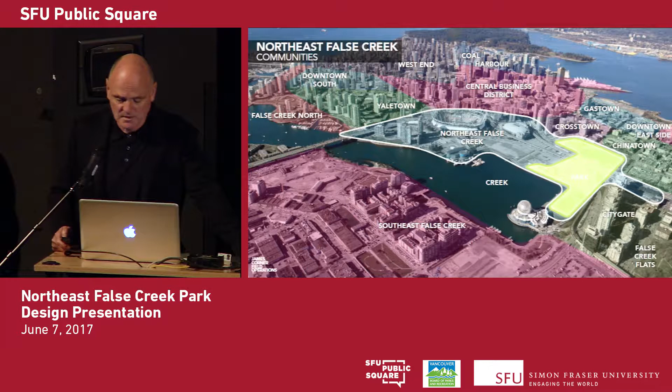Let's just introduce you to some of the characteristics of the site, because it's important to understand that this site has a number of opportunities, but it also has significant challenges.

Firstly is just the configuration and shape of the site itself. You can see how the white outline here shows the relationship of the site to the water body. The water's edge itself, if you could walk just around the East Basin, is 2.3 kilometers, which is a significant experience. There are some very large buildings here which give the site a particular iconic character: the stadium, the Rogers Arena, the Science World.

In pink are a number of developments. These are developers that are building new neighborhoods, mixed use, a lot of residential, but on the bottom is retail and restaurants and cafes and some commercial uses. So these are massive differences, bringing new life, new people, and new vitality to the area.

These are probably the three most significant connections into the site: Georgia Street, Carrall Street, and Quebec Street, forming that edge. Related to those streets are then a variety of cross streets, which in a sense are the major points of entry into the site, tying or literally connecting the neighborhoods, the buildings, the people who live here into the new park.

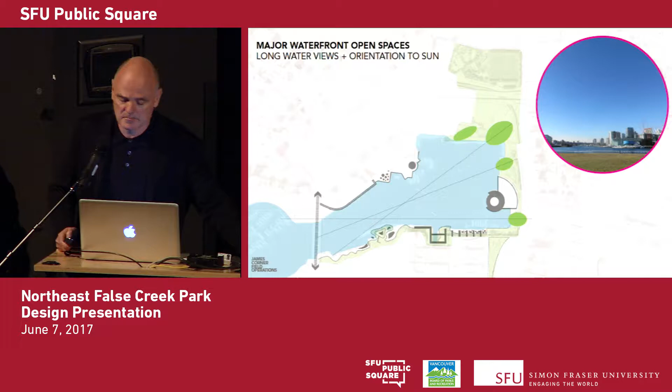So the first move we thought of was to position two large landscapes - the big eventful landscapes, the open and flexible surfaces, let's imagine them as lawns for now - oriented on the long axes of the water body, drawing you towards those long vistas along the water, and also orienting you to the afternoon and evening sun, when most people are coming out to use the park for either recreation or events.

Secondly, in between those large landscapes, let's try to pull the water in and create a variety of inlets where you can actually get down to the water. And let's tie those two moves - the big landscapes and the water inlets - together with a single meandering promenade that lengthens your duration of experience, taking you out over the water and then back inland, out over the water and back inland again, so you have this folded, meandering experience that lengthens and diversifies how you experience the water's edge. Seen in total, this begins to unify the 2.3 kilometers of the Eastern Basin waterfront.

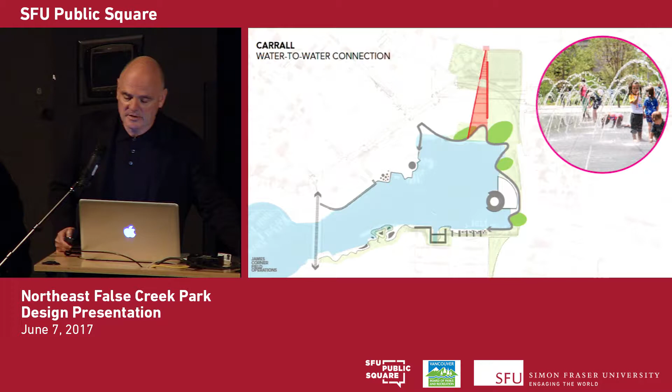The second big move is to look at Carrall Street and the importance of connecting it to the waterfront, especially given that we'll have a new Pacific Boulevard that's going to be pretty big. It will be tree-lined and majestic, but it will still be challenging for pedestrians. So how do we create a strong pedestrian connection along the Carrall Street axis?

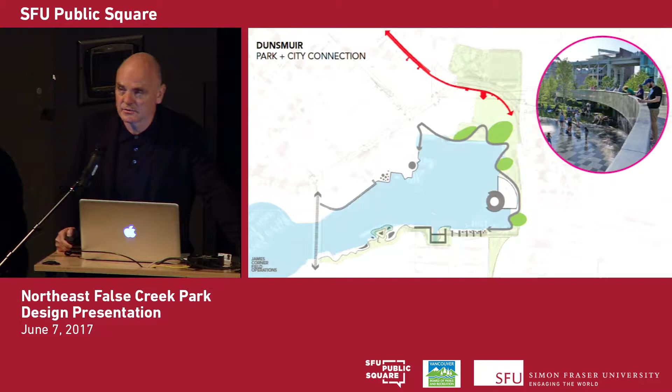One of those is the bicycle, the Seaside Greenway. Here we show an idea to bring the greenway into the park and out to the waterfront on the western side, but then to pull it into the park in order to open up the waterfront and give the waterfront more of a pedestrian identity in the center.

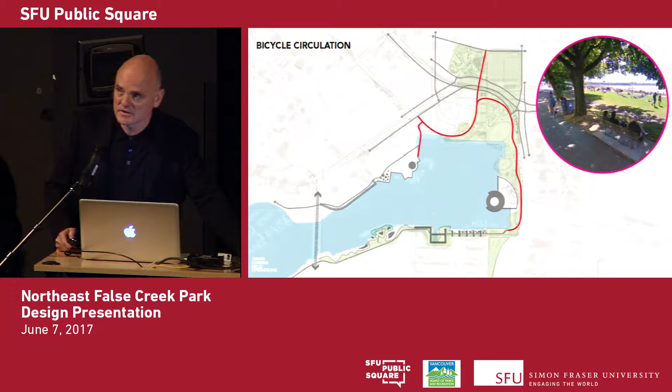You can see in the photograph, this is something that you already do in a lot of your parks already. You pull the cycle tracks back from the waterfront so that the waterfront can enjoy public spaces and pedestrian activity. The cyclists can enjoy free mobility, and they still have long views and vistas across the park and out to the water.

Within that diagram, we create a variety of rooms for a variety of programs and a variety of amenities, from gardens and interactive spaces to lawns and meadows, sports areas, etc.

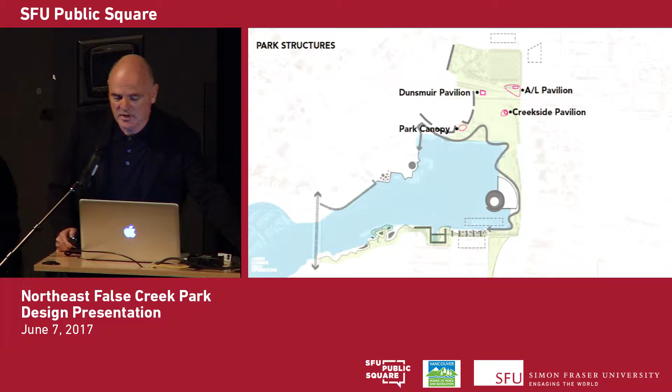There are a number of small buildings we're proposing. The A/L Pavilion is a covered area for the skateboarders. The Creekside Pavilion will be a sort of visitor orientation space. And the Dunsmuir Pavilion will be a small food and beverage, a small cafe, and a park canopy that I'll describe in more detail.

Put together, that creates the sketch, the draft concept plan that I'll walk you through now in a bit more detail.

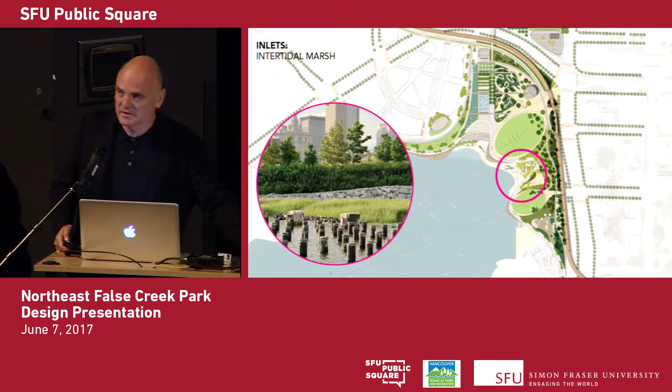The intertidal marsh is this piece that we've folded into the land. We see this as being a very natural area where the water can ebb and flow given the tides. We can scallop the land in this way in order to create a variety of ledges. Each of the ledges can carry a different intertidal habitat zone.

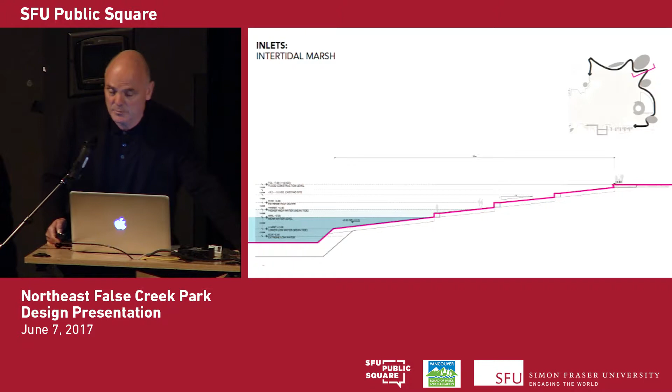It will have different grasses and support different types of bird life and animals. It will have this intertidal quality because there is a significant tidal change in the eastern basin between low tide and high tide. So this is really a place that ebbs and flows and is really a very generous set of beaches and natural areas on a set of ledges that rise back up to the more formal park. But it's a place that we hope is a place of discovery where people can come and just experience a piece of intertidal nature.

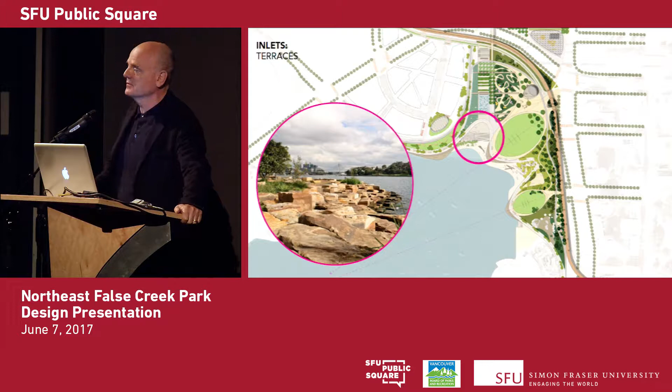The other inlet is a little bit more formal and is oriented towards more people gathering and more social uses. We imagine it as being a set of steps built from stone, and those are sittable, so people can sit on these steps and look out across the water.

At low tide, the beach shows itself with logs and rocks and has a very beachy feel. But the steps also have a rocky quality to them as they step down from the upper levels of the park down to this natural area. And we want the beaches to have this rough, natural, found quality to them.

So this view, you see the two inlets on one side, the seating steps, the rocky outlets, the beach, and on the other side the more natural inlet and the promontory of the Great Lawn projecting out over the water with the axial view to the setting sun.

If you step back, you can see how the ribbon is shaping these three landforms on the upper level, which are quite clean and available for community use. And on the lower level, you have the intertidal landscape with the beaches, terraces, and wetlands.

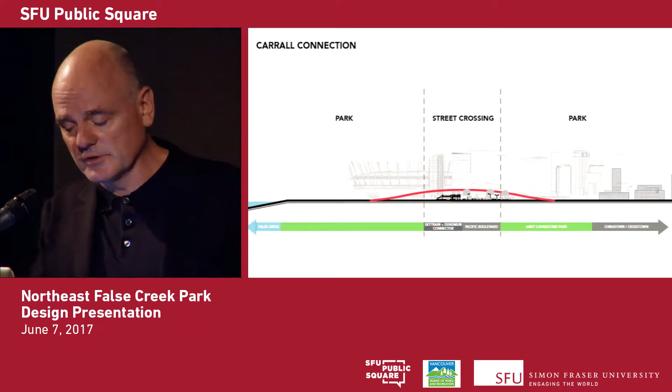We see it as similar in scale and character to, for example, the bridge at the Art Institute of Chicago at Millennium Park. If any of you have seen this, it's a very graceful and beautiful structure—it really disappears, but it's instrumental in facilitating pedestrian connection from one part of the park to another.

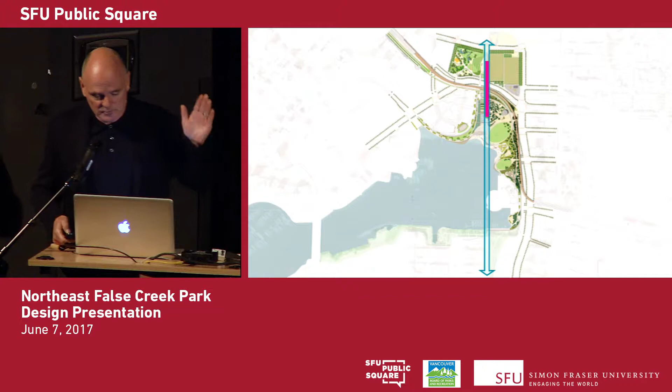Symbolically, we have this line—a water-to-water connection, connecting Burrard Inlet to False Creek. But at an even larger scale, symbolically it connects to the larger Ontario Greenway and the Fraser River. So we think this is an important marker, not only facilitating connection into the park, but also reinforcing the mental map and orientation to this larger Greenway connection.

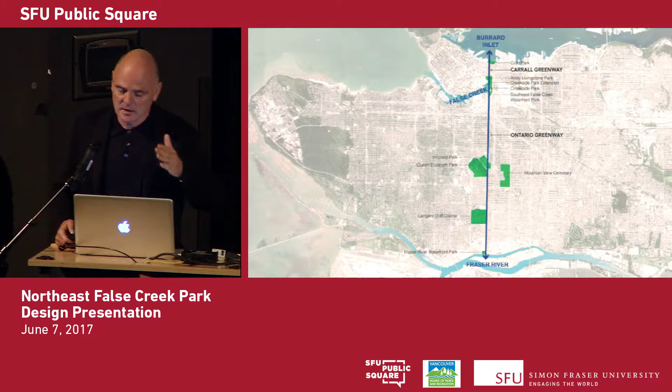At the foot of the passerelle is a plaza that we'd like to see as a really interactive water splash pad feature—a hardscape of stone with interactive fountains that people can play in and run around in, family oriented. Something beautiful in how the fountains and jets work, but also inviting participation and interaction, especially for families at the foot of this connection.

Another important component, running parallel to the passerelle, is a series of wetland gardens. We want these to collect all the stormwater in the park, which would come into these wetland gardens and work its way over stone terraces, down and out onto the beach below. They should function in wet weather to collect stormwater, but also have a beautiful wetland garden quality with irises and grasses, improving water quality and providing an experience for people to sit amidst the wetlands, within a landscape that's working to process and clean stormwater from the park.

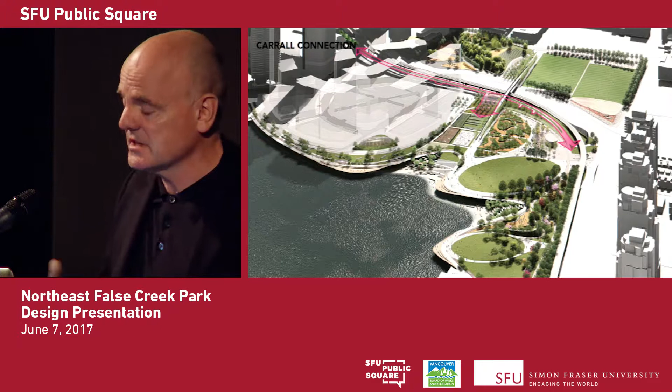At the back of the site is the Dunsmuir Elevated Park, coming off from the central business district as a raised structure, then grading down, down, down until it touches ground around here. In order to diversify some of the experiences on that linear element, we have a number of overlooks where you can get a raised view, a raised vista, and a stepped amphitheater here, where you can step down and come to this lower level of gardens. Those steps are designed as seating steps, so they'll also function as a small amphitheater.

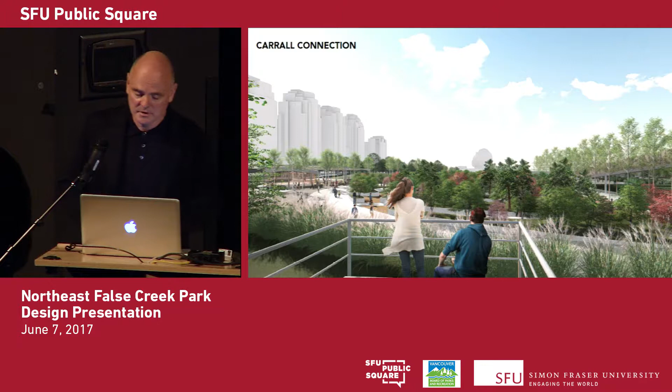For some of the overlooks, we've learned a lot from the success of things on the High Line, for example, where you step off the promenade portion simply to take a seat and look at the view, framing that view. Or another overlook situation here, for example. This is a quick rendering of what that Carrall connection overlook could look like. Because you're raised up, you'll get elevated views across the park and across the basin.

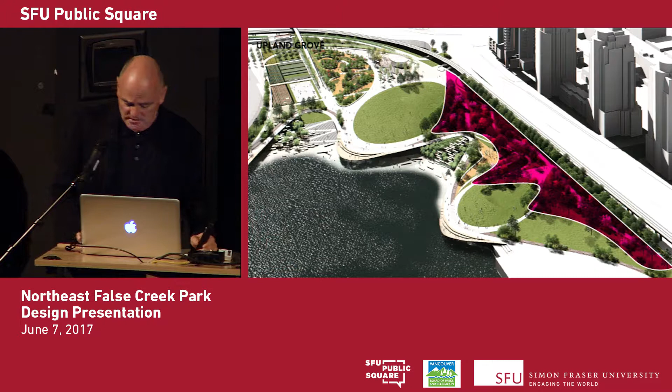On the Quebec flank of the park, we see this as being planted up as a buffer to keep the street out and keep the park quiet. We like the idea of using Douglas fir and other plantings here to give an evergreen, denser quality to this edge, but also to embed in that planting various community facilities, especially oriented around play, children, and families—places for a small picnic, a small play area, a small seating area, etc.

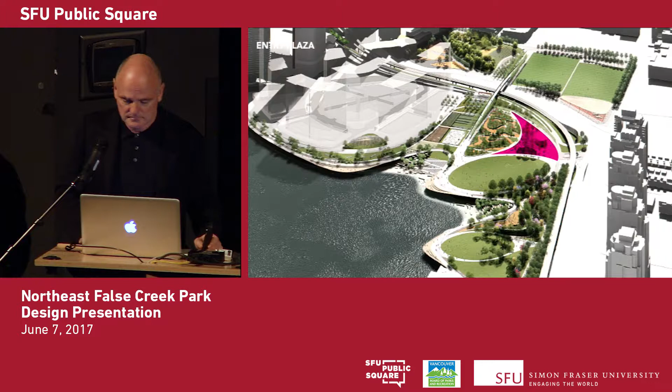This area here will be a primary entrance into the park, because of this location in relationship to Quebec. This will be a pretty major entrance for all of the communities over here to enter the park. And here we see a central gathering area, a space where people can enter the park, get oriented, maybe have a seat, maybe buy a coffee.

We see it used as a flexible plaza-type space, a lot like this in Battery Park City, where there's a small pavilion where you could buy coffee in a stand of trees pruned very high, so you see right through them to the waterfront. There are movable tables and chairs underneath, creating a very informal piazza-type setting.

In this area, remember, buildings will eventually be built up, creating the new neighborhood, but we've carved this area out as part of the public space of the park. Here we see an opportunity to create a covered event space. If any of you know Director Park in Portland, it's a very successful space because this big roof keeps the space below dry during inclement weather.

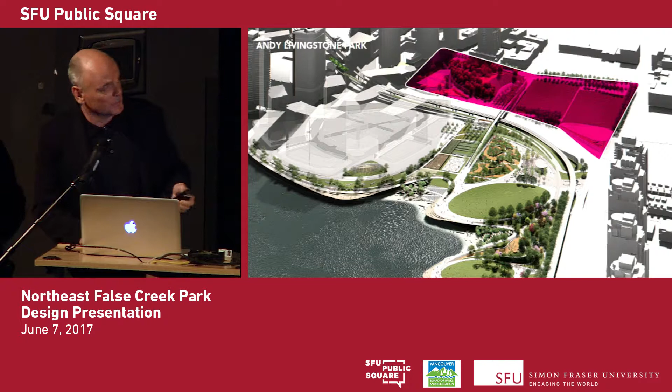And then over to Andy Livingstone Park on the other side of Pacific. This is the park today. This road that bisects the park today will be removed, so you begin to get a contiguous park. But you can see this red line overlay is the new Pacific that's being built. So there is a need to make some significant modifications to how this park works and how it ties everything together.

So in this sketch, you see the Carrall Street Passerelle with a variety of gardens alongside the bridge, the two sports fields, the new skateboard park with a covered roof. We've jogged these sport fields in order to create a grander entrance into the park here at this corner, to have a stronger relationship to the Sun Yat-sen Garden Park as well as over to Chinatown.

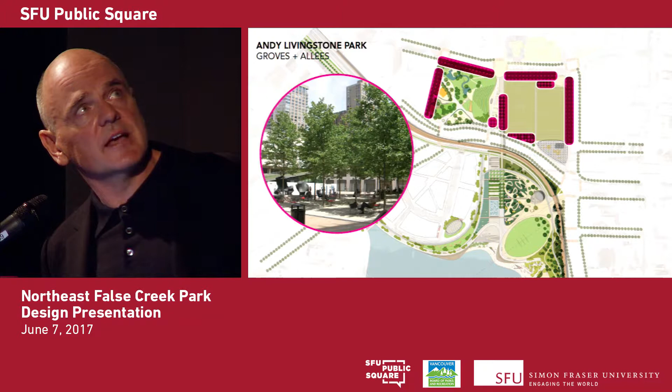And then here we build a hill. There's already a hill here and a hill here, so instead of the road, we'll fill in the road to attenuate the hill, retain the existing new playground that's just been built, and strengthen the edges around the park and strengthen the connections.

In this area, really we're retaining a number of existing features in here, but enhancing the plantings and enhancing the connection. In this area, carved into the hill, will be a variety of seating terraces that invite a small impromptu performance space here, as well as allow for spectators to view sports.

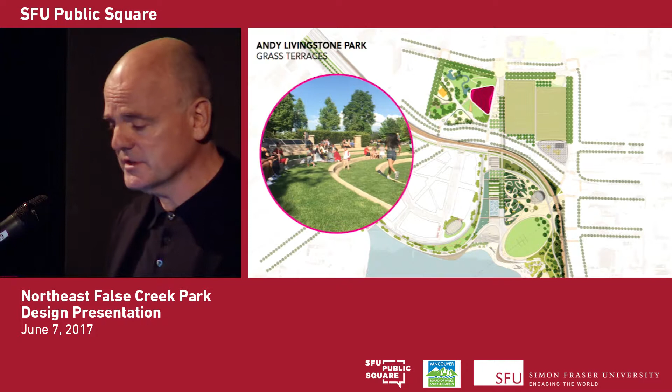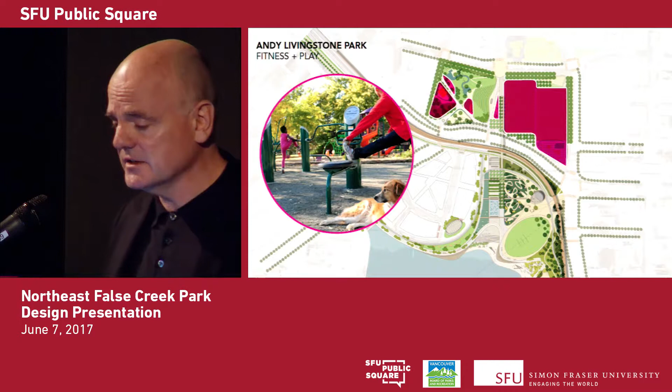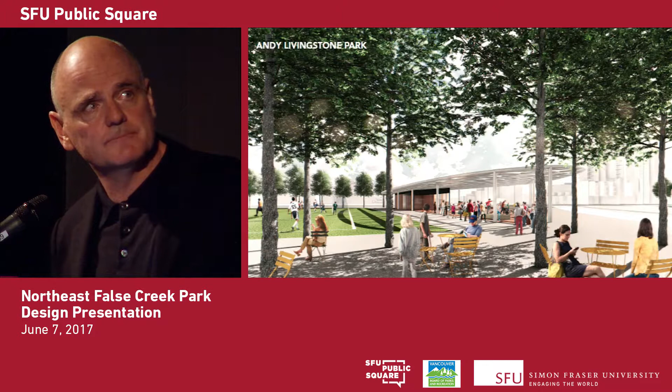The fitness and play, of course, there's sports fields, there's the skateboard area, there's a variety of play areas here for different age groups. The off-leash dog park area that's already there will be renovated and made a little bigger and a little better. And this is just a typical view of the characteristic of that park, flanked by trees for shade, movable tables and chairs underneath for informal gatherings, the covered roof over the skate park, or the amphitheater looking at the beginnings of the passerelle and the sports field beyond.

So an aerial view, you're looking at the Sun Yat-sen Gardens here, the soccer fields, the skateboard area, enlarged area here of parkland to create a much more generous and welcoming entrance. This portion of Andy Livingstone Park, which is oriented really towards the community. The passerelle going over Pacific and over the metro line. The new Dunsmuir connection for cyclists and joggers and walkers to come into the park.

The park sort of welcome area with the pavilion. The horticultural gardens, the splash pad, the wetland gardens, the promenade around the flank of the new neighborhood with restaurant and cafe frontage, the ribbon that runs around the waterfront with the inlets down to the beaches and the natural intertidal areas. So in a fairly small area, I think we've packed a lot of diverse experiences.

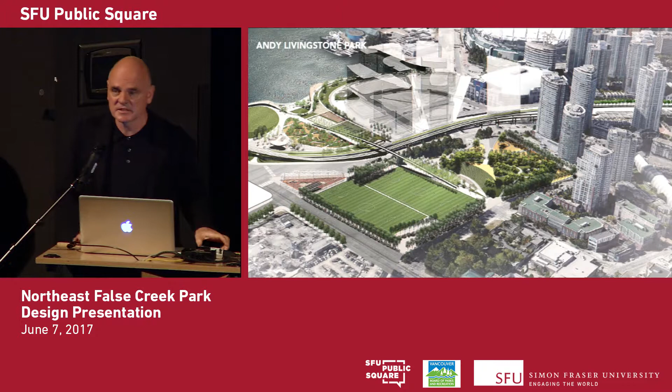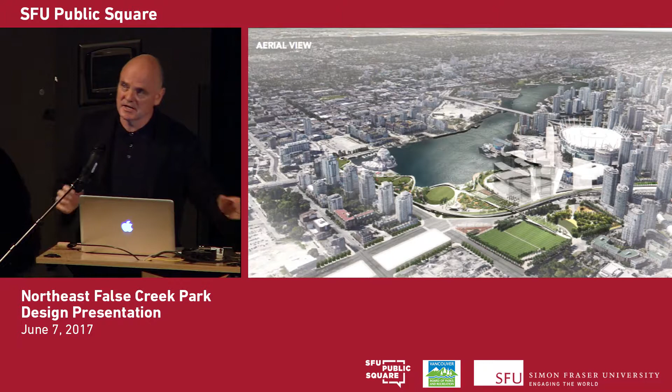Some of them quite open and simple, and some of them more intimate and experiential. And this is just another big overview that just situates the park in the context of Vancouver and goes back right to what I said at the beginning, which because of the expansion of neighborhoods and development out from the central business district, we believe that this park will become, in a sense, the new central park, the new centerpiece, both symbolically and literally, physically, for all of the various neighborhoods that surround it. One more view, looking at the water and the edge and the mountains behind.

And finally, I'm supposed to introduce the fact that now we'll have some panelists come and join me on the stage, and we will welcome, invite, and discuss questions that you may have. Thank you.

You all right? Yeah, so if you go and sit there and I will.